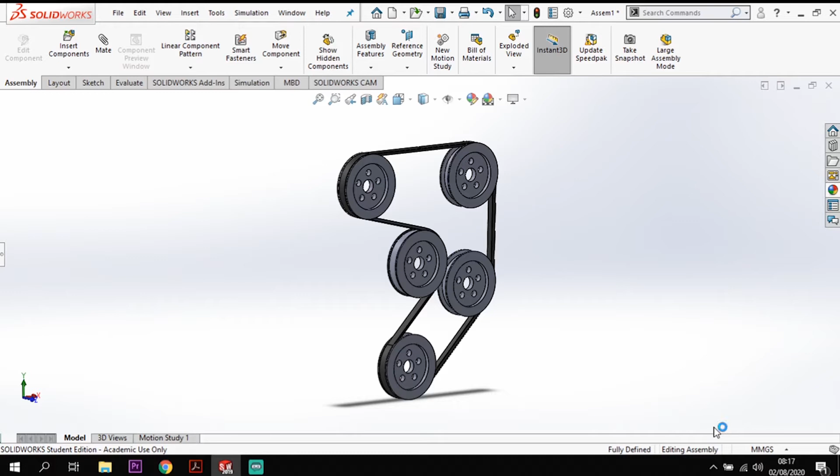Now let's dive in and have a go at modelling these pulley systems. Okay, so let's start off by making the pulley. We're going to make two types of pulley. The first one is going to have our V slot in it for our V-belt, and the other one is just going to be a guide pulley. So let's have a look.

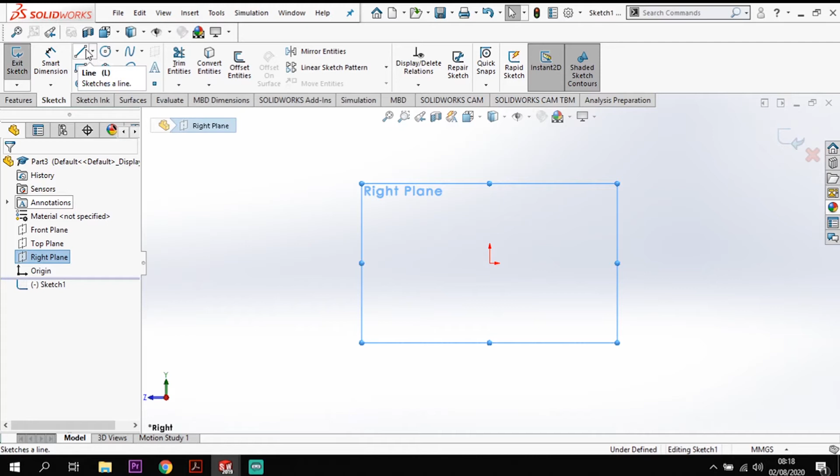So I'm going to start on the right plane, sketching on there, and I'm going to start off by creating a centre line through my origin here. I'll create my centre line, connect that to the midpoint, and I've got my centre line going through my origin. I'm just going to put a size to that, and it's going to be 25mm wide there, like so.

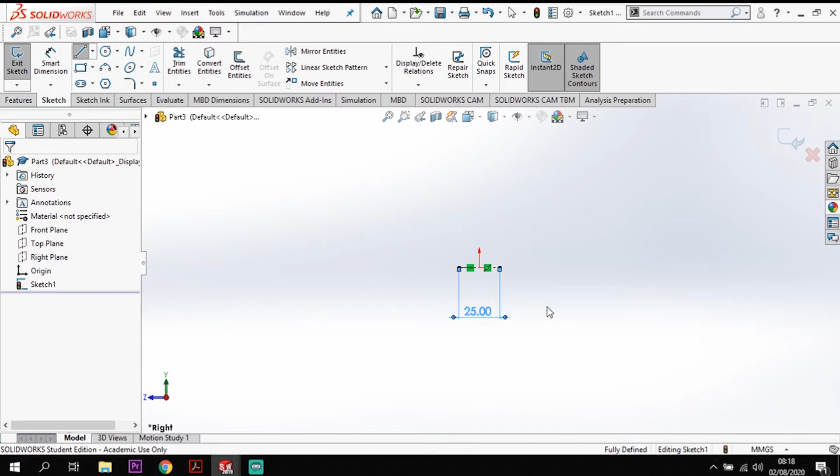Okay, so once I've got that in place, I'm then just going to create a centre line coming up here, and this is going to be 60.

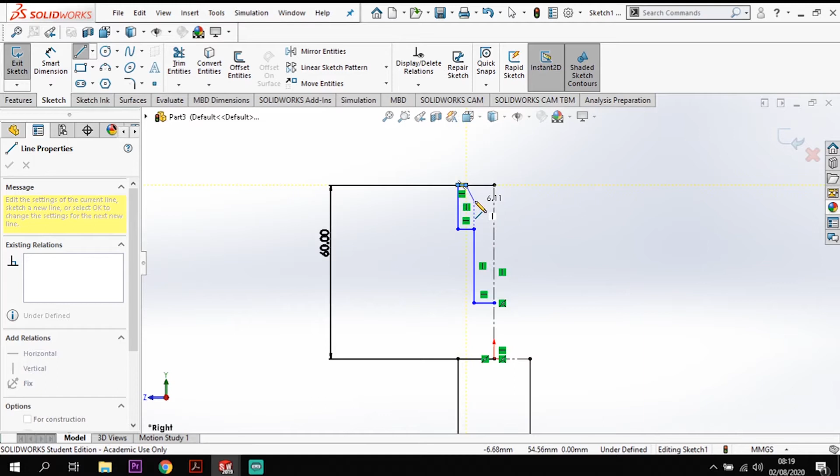Okay, so I'm just going to come out of this, create my step process, and I'm just going to get a rough outline of what I want my sort of V-belt to look like so. And then I can start putting some sizes to it in a moment.

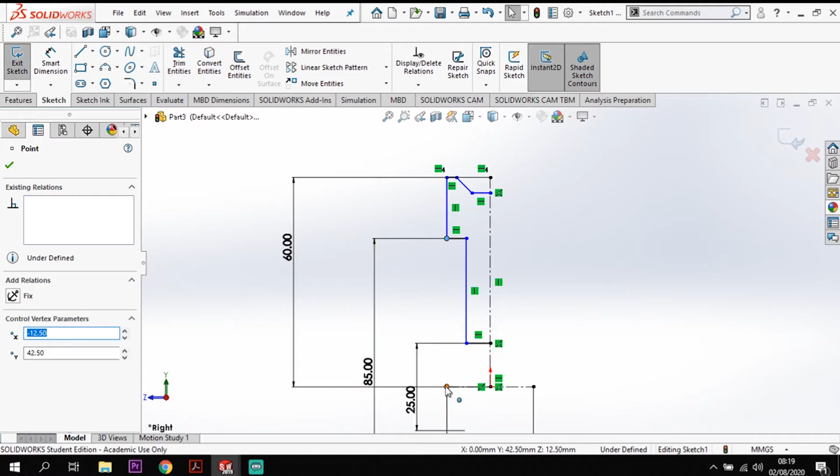So I'm going from there to there, that's going to be 25. From there to there, and that's going to be 85. And the top of here is going to be on line with the top of my centre line going across in the horizontal. I want this to be on line with the outside of my centre line through my origin.

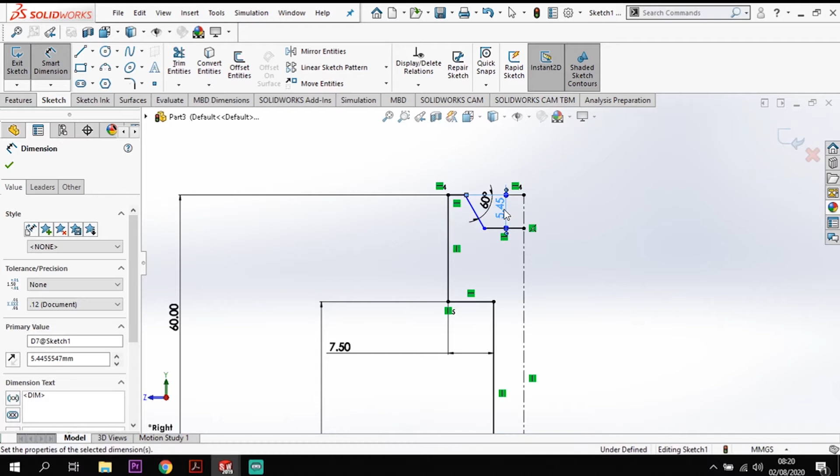And then I'm going to create a little offset here step of 7.5 in there, like so. I want my distance around there to be 60 degrees and a drop down step here of 6, like so. I want that little step in from the side there to be 3 millimeters, so just set that as 3, and we've got that information in place like so.

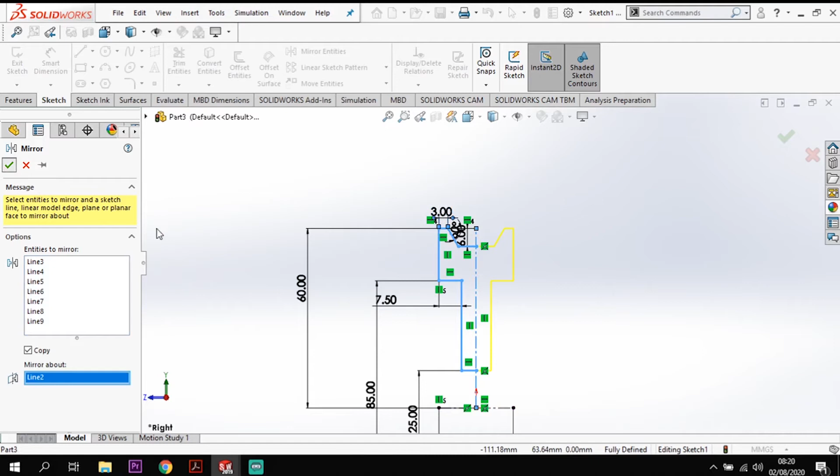Now once I've got that, I can mirror that across. So if I go to my mirror tool, I can take this lines I've created on this side, and I'm going to mirror about this centre line here. And I'll create the same shape on the opposite side, giving me the full profile.

Once I've got that profile in place, I'm going to go to Features, Revolve, and I'm going to revolve it around the centre line here at the bottom and get that shape.

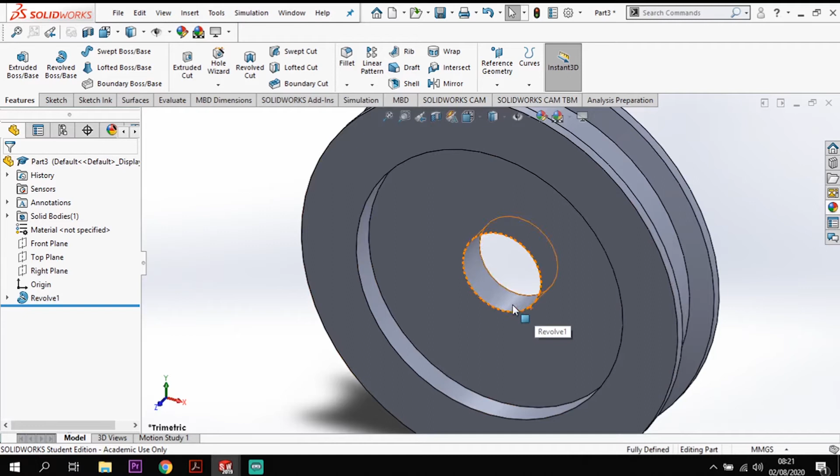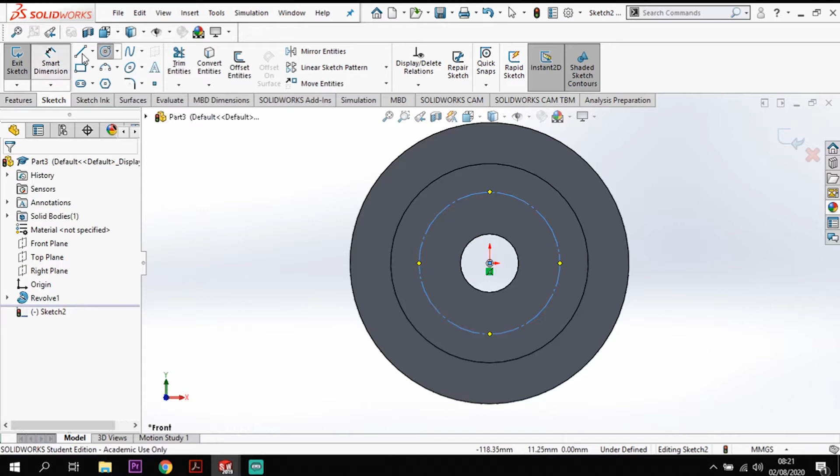With that in place then, I'm going to sketch on this inside face. Turn that so I'm normal to that face, and create a circle. That circle is going to give me my distance out from the centre, so I'm going to use that for construction, and I'm going to set the diameter of that at 50.

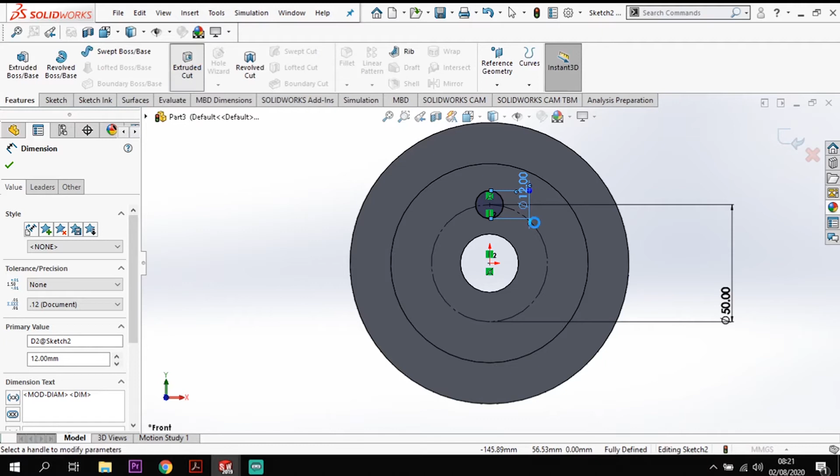Put a circle from that top section there, and that is going to be 12. So I've got a 12 diameter circle there, which I'm going to cut through. So Features, Extrude, and I'm going to cut through that, through my model with that there. So I'm going to go through all, making sure that it's coming out the other side, tick like so.

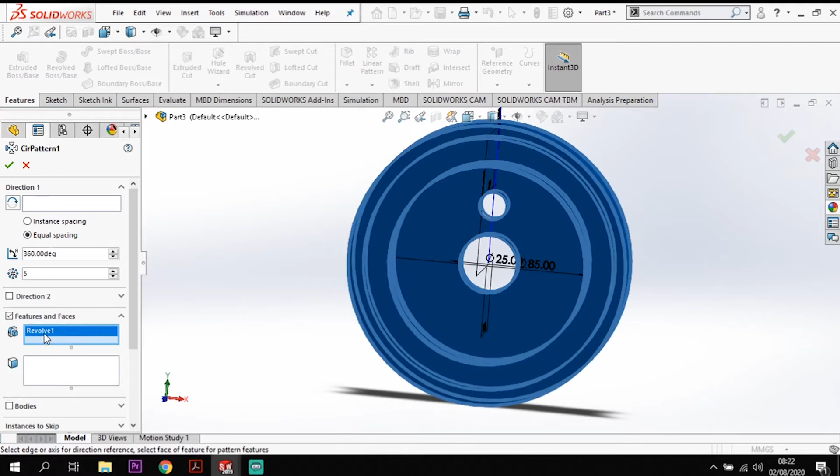Now I've got that one in place, I'm going to pattern that. So I'm going to go to the Pattern tool, Circular Pattern, I'm going to select this inside edge, any circular edge will do. Taking the pattern, let's take that pattern first. So I want that cut pattern as the component that I'm going to use, and I use my direction as that inside edge there, and you'll see it's picked up on them.

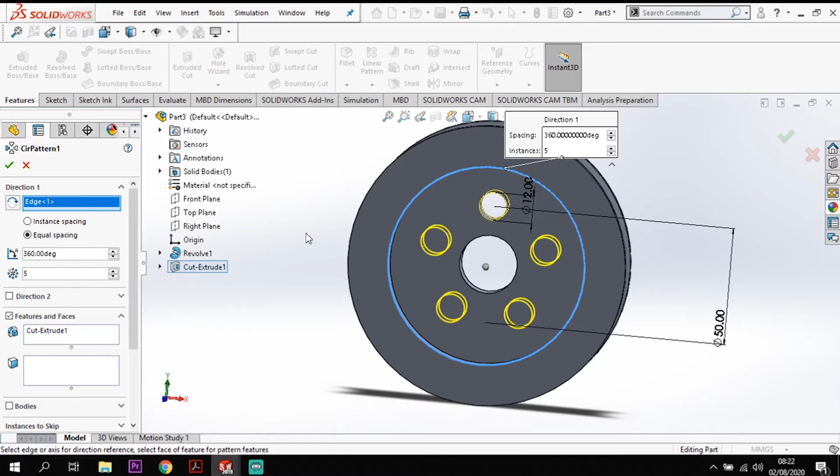I've got it preset equally spaced, and I have already set 5, so we're going to use 5 for this, but you could change that to suit, and that will give me the 5 cutouts there, and that is my first pulley completed. So I've got my V-belt pulley completed.

Now to create my second pulley, I'm going to edit this, so let's have a look how we go around doing that.

Right, okay, so now we've got that saved as our pulley. Let's move on to create pulley 2.

What I'm going to do is edit what I've already created here. So I'm going to go to my original revolve, drop that down and go to the sketch and edit that sketch.

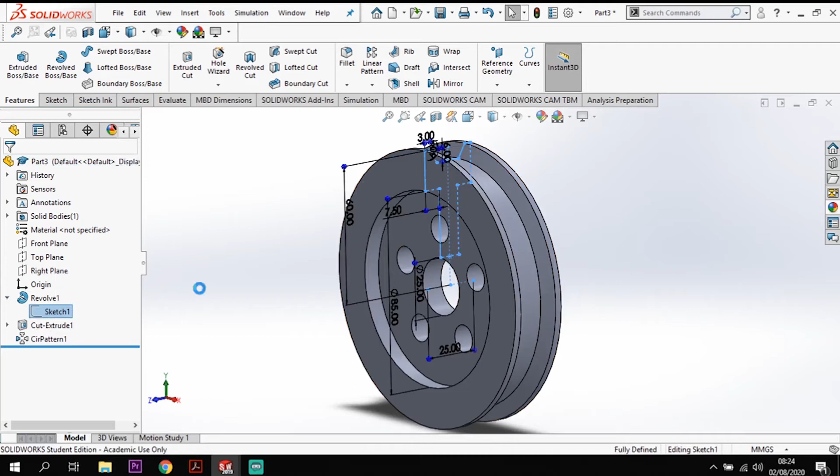I'm going to start off by editing this center line coming up. I want to extend that slightly, so I'm going to go up to 62.

Like so, and then I'm going to edit this profile here. So that's currently set at 60 degrees. I want to get rid of that.

Now this is a guide, so this is going to fit on the back side of our V-belt. Our V-belt on one side will be this V shape, and the other side will be flat. So I'm going to make this a straight, vertical line straight down.

I'm going to change that from 6 to 2, so it's just got enough there to hold onto the belt so it doesn't slide off. And there we go, we've got that shape in place now.

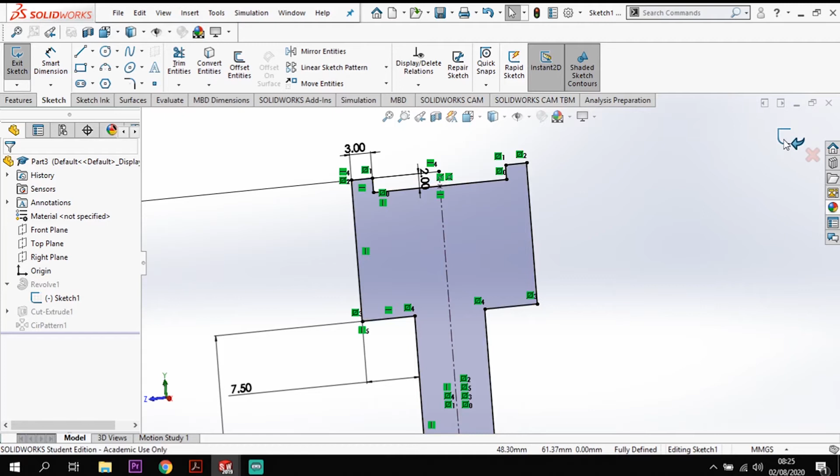So I'm going to come out of there, and you'll now see how I've got the guide pulley. Now I haven't changed the size of it. You could change this so that it's a lot smaller pulley if you wanted to, remodel it for a smaller pulley. Just for the sake of this tutorial, I've just changed the profile on the end there so that it guides the belt around.

Okay, so now we've got them in place, I'm going to go over to the assembly and have a look at how we assemble this together.

Okay, so now we're in our assembly. You'll see how the pulley option has come up here. So we're going to import our first pulley.

So I'm just going to click on that there, and I'm going to go to the tick icon at the top and drop that in. What that will do is connect the origin, which is in the center of here, to the origin on our page.

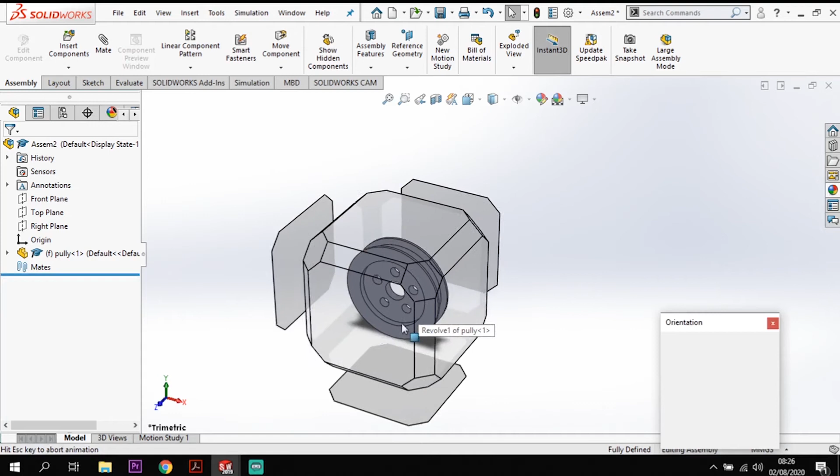So now we've got that in place, I'm going to create a profile for where I want the rest of my pulleys to connect to. So what that means is I'm going to create a sketch.

So on the front plane, I'm going to sketch, and I'm going to use a center line here, and I am going to drop some directions in, or some lines to follow for my mates for later on.

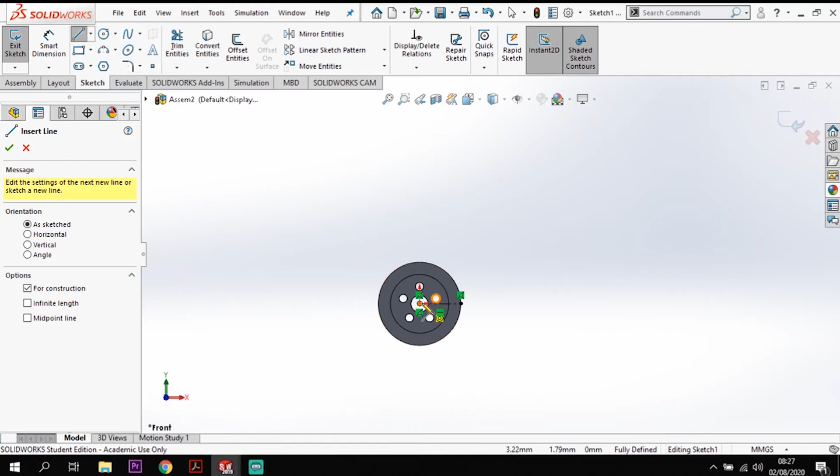So I'm going to come up here, and I'm just going to rough this out to start off with, and I'm going to create something that looks a bit like that. Okay, so I'm going to have a pulley on each of these points, and this will create the shape that I am after.

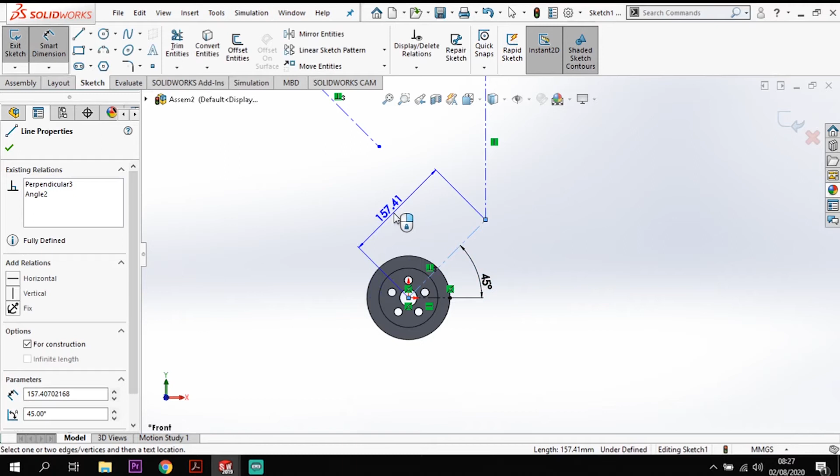So let's start off with from here to here, the angle there being 45 degrees, which it is. I then want the set distance there, which I want to be 200. I want this vertical height here to also be 200.

I'm going to make my offset distance going across the top 250. And then I want this distance coming down here to also be 200, but I'm going to create an angle there of 50.

Let's get rid of that relationship there before I can do that. So we've got our relationship there, which is making that perpendicular to that line, so I'm just getting rid of that. And then I can put in my angle there of 50, like so.

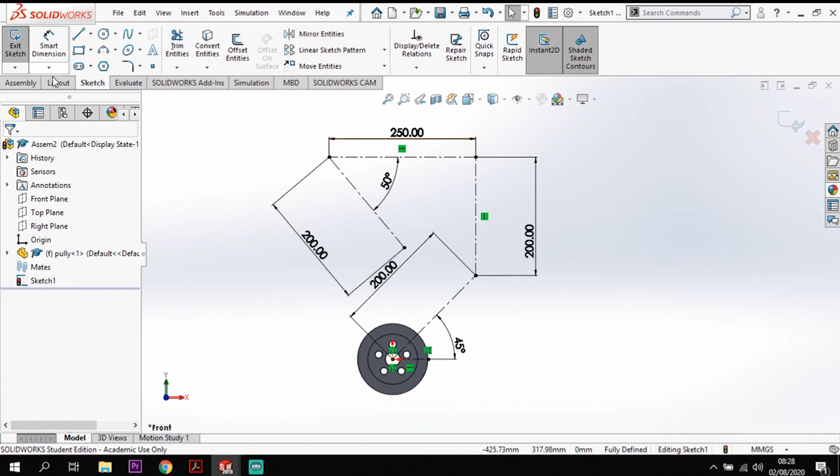So I've got that profile for where I want to drop each of my pulleys. So let's put some more in. I'm going to go to Assembly, Insert, Pulley, and I'm just going to drop one by each one for now.

Insert the pulley, insert another pulley there. Okay, so I've got them 4 pulleys in place.

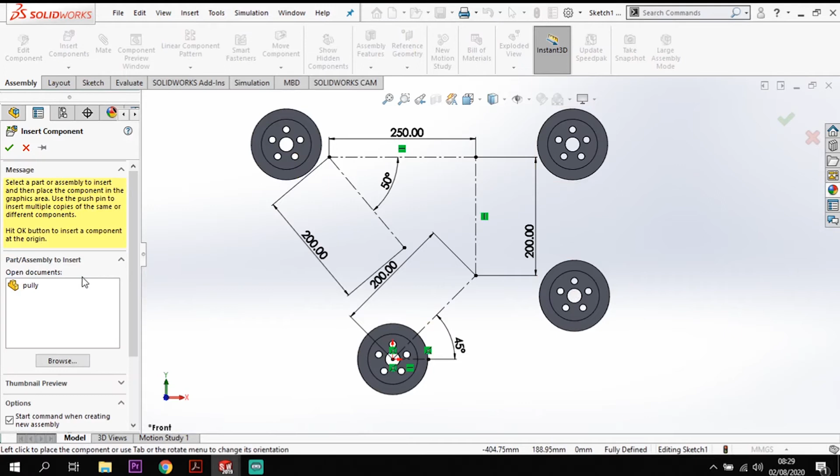I do also want to insert pulley 2, which is going to be my guide pulley, and you'll see that in a moment. So if I just drop that down there, like so, I've got my guide pulley and my 4 belt pulleys that will guide my V-belt there.

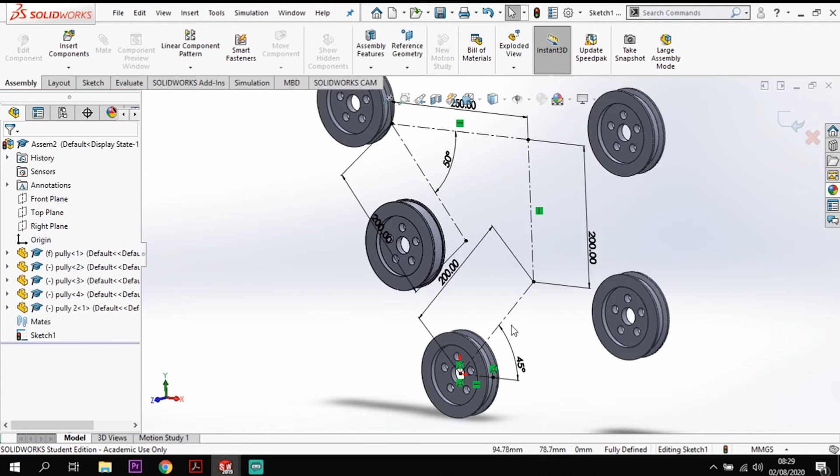So how am I going to make these? It's really simple. I've got pulley 1 there, which is fixed, so I'm going to go to pulley 2.

I'm going to drop down that, and I'm going to find the origin. So I'm going to drop down pulley 2, find the origin, and I'm going to hold control, and I'm going to click this point here at the end of my construction line.

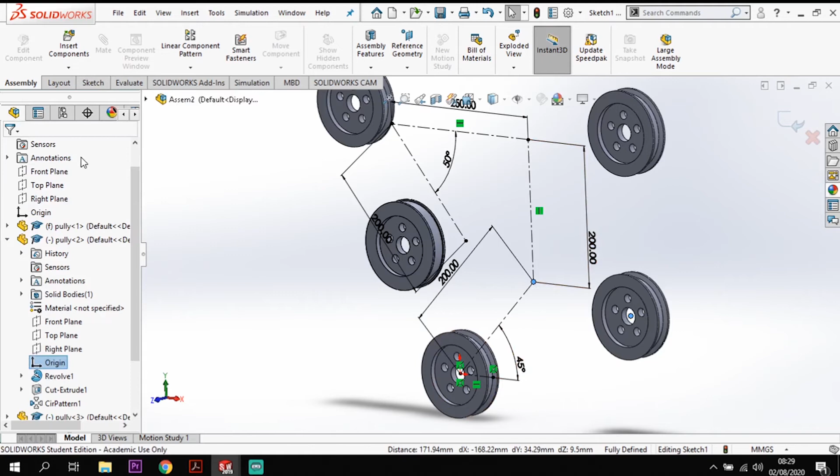Come out of my sketch first, that'll help. So we come out of our sketch, find the origin, find the point there, and hit mate. That'll pull that into place on that center position. Tick. Exit that.

Drop that back together. So that was pulley 2. Let's go to pulley 3 now. Find the origin, the edge, and mate there. That will pull that into place. So we've got these in fixed positions, so we know exactly where they are.

And just repeat this through all 4. So I've got my origin, the end point of the line, and again mate that there.

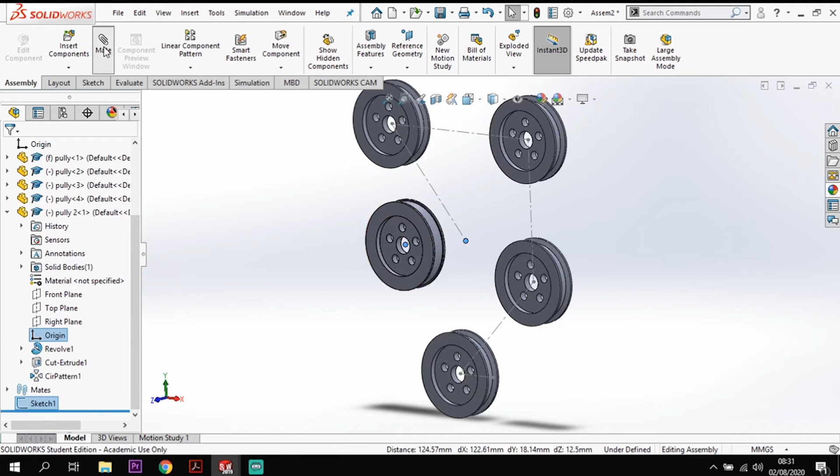Tick. And the last one is going to be my guide one. So I'm going to, again, find my origin, find my endpoint in my line, and mate them together again, and they will move into position like so. So we've got them all in place now.

And I can exit that. So what I'm going to do, so this construction sketch in the center doesn't get in the way, I'm just going to go to sketch 1 at the bottom here, and I'm just going to hide that.

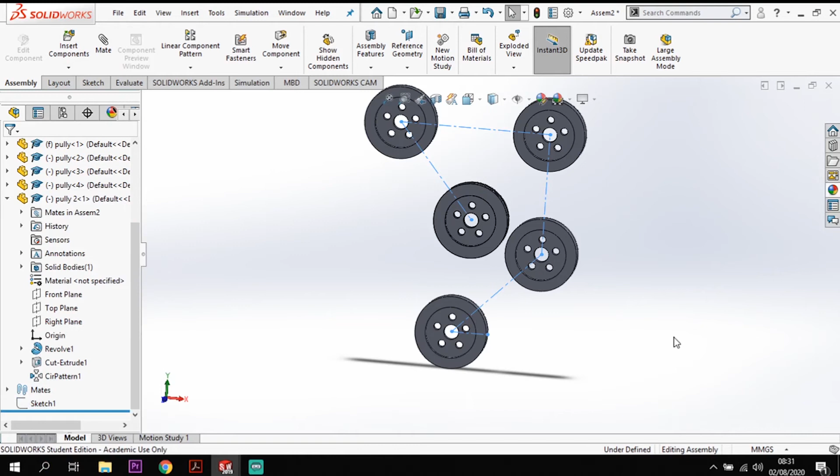Okay, so we've got them pulleys separated out into the positions where we want them to be. We just need to now actually create how we're going to do the belt. So to create the belt,

what we're going to do is we're going to create a sketch. Now I'm going to, again, on my front plane, create a sketch, and I'm going to use the line tool to do this.

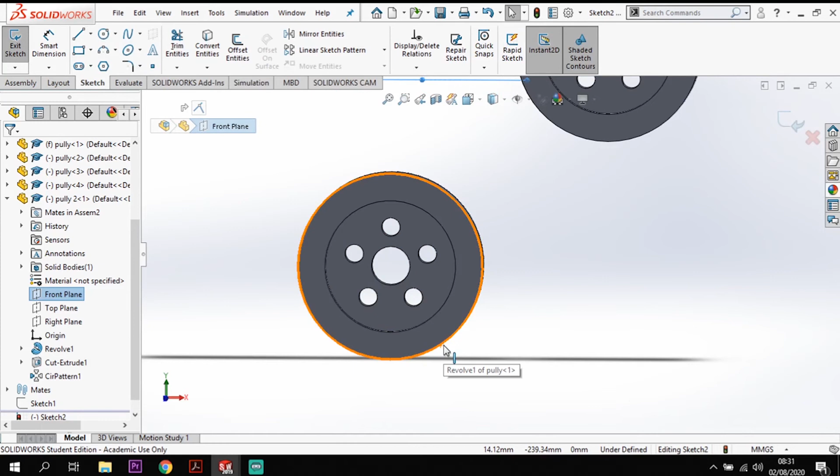But first of all, I'm going to go to each of the pulleys, and I'm going to get the outside edge of these 4, which I want the V-belt on, and on this one I'm going to get the inside edge there, like so. And I'm going to convert entities on them. That will turn them into sketches.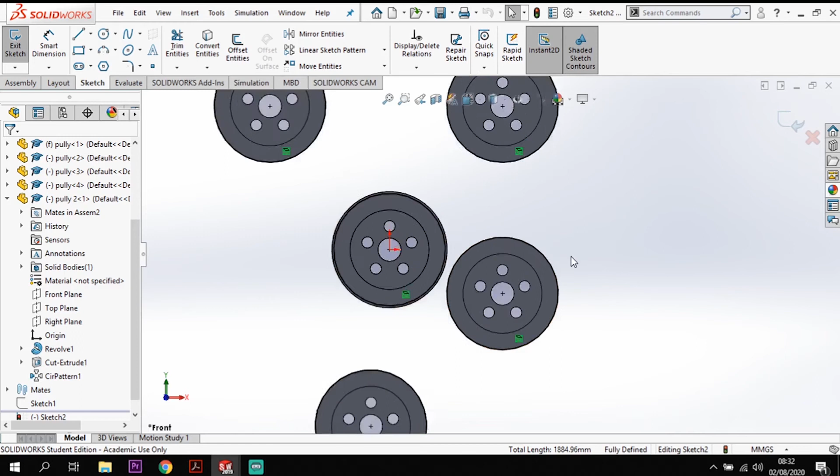So if I move straight on, or normal to the front face of all of them, you'll see there is now a sketched line on the outside of each of them. There's one on the inside there.

So I'm going to create a loop around them. So get a line. I'm going to come to this one, put a line on there, and I'm going to make it so it's tangential. So all I've done there is click on the circular line and drag it away.

And then I'm going to move over to the next one up here until I find the tangential point, which is there. Okay, and then I'm going to follow this around, so that one's going to come straight up using the end point of the circle, or the edge, or the coincident point, and follow across again to the top there, like so.

So I've got this line started to come around the outside. And then I'm going to find the tangential point on here, so drag out, we've got that again, and match it up to the one on that inside edge there. As you can see, it's matched up there.

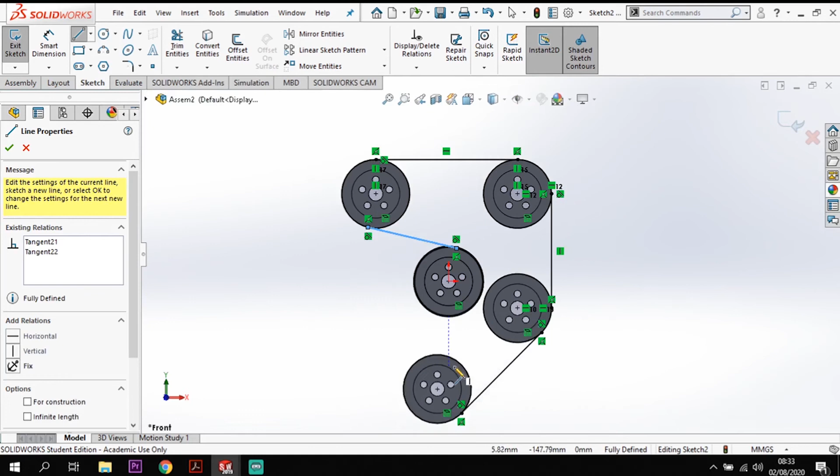And then I'm just going to finish off by creating a tangential point from this one down to our bottom pulley that we have there. And we've got that loop. So we've got this loop around.

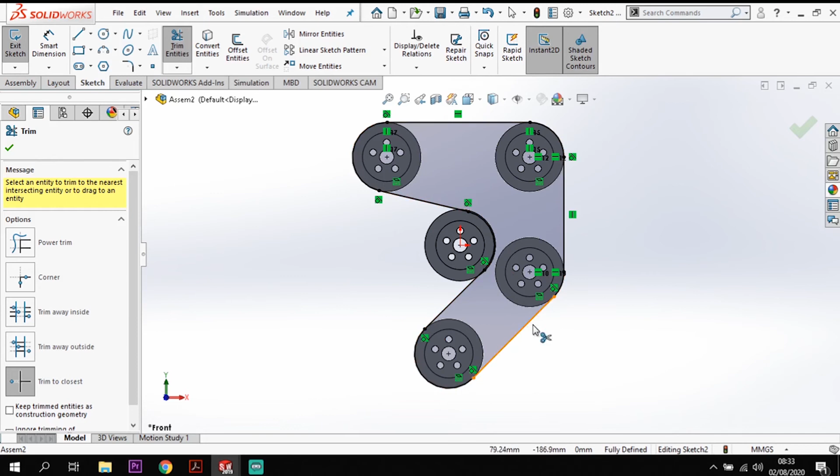We've got the inside edges of these circles, so I'm going to get rid of the parts we don't need. Just that, there, and there, leaving me with a completed sketch, a loop around that outside. So if I tick that and leave that sketch there, and you'll see we've got that loop in place.

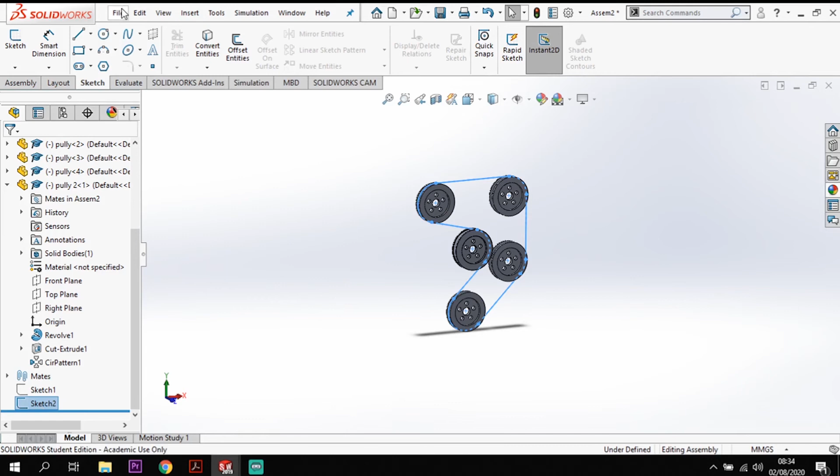So I'm going to take that loop, and we can do this really easy. I'm going to click on the sketch here, and I'm going to Control and copy on the keyboard. So Control C, and then I'm going to go to File, and I'm going to open up a new part.

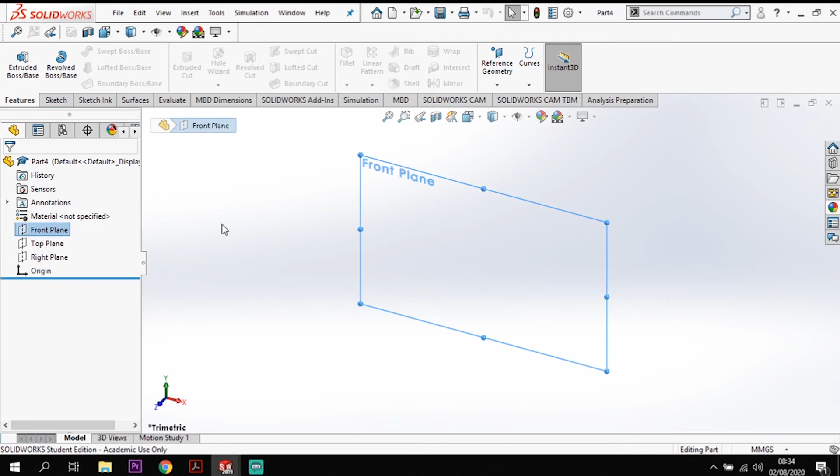Now on that new part, I'm going to go to one of my planes - doesn't matter which one. If I go to the front plane, and then Control and V. So I've not done a sketch, I've just clicked on the front plane, Control and V to paste, and it will copy the sketch onto that plane. So if I go to my front plane now, I've got that sketch on my front plane in a part, and from here I can model my belt.

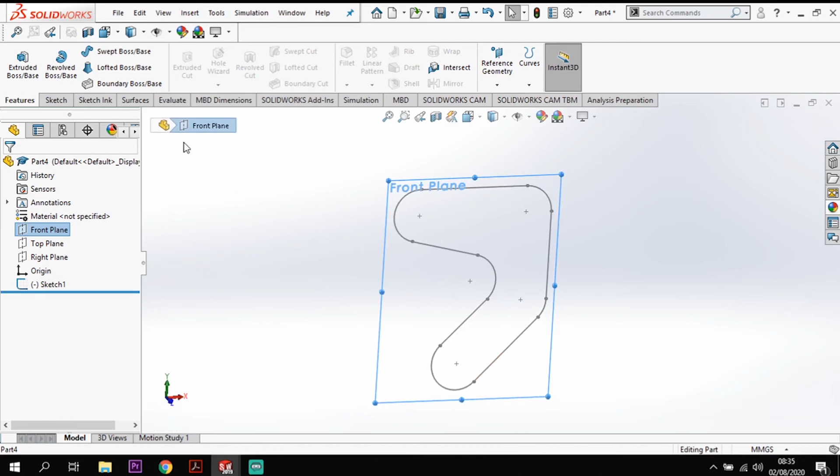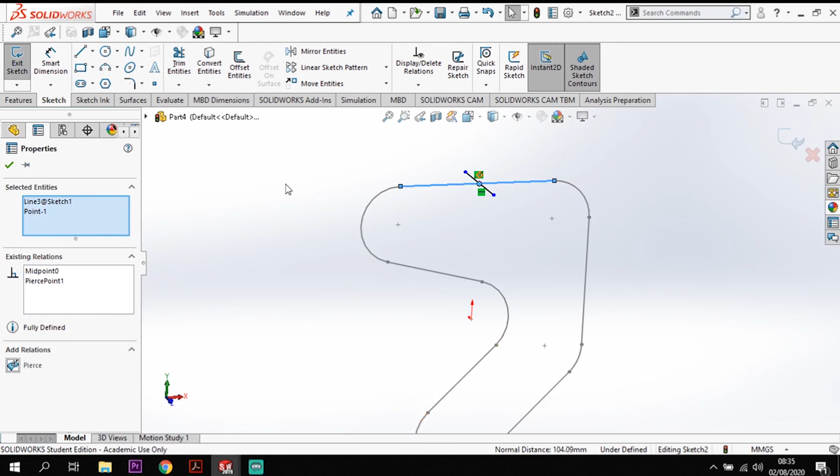On the right plane, I'm going to sketch and create a line which goes coincident to the top point there. So I want that center point of the line, and I'm going to pierce it to that shape we've created for our belt. Once I've got that in place, I'm just going to turn normal to that sketch.

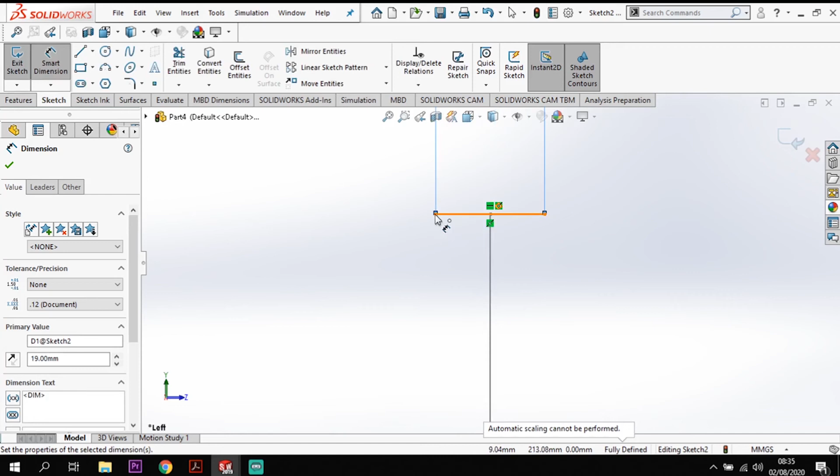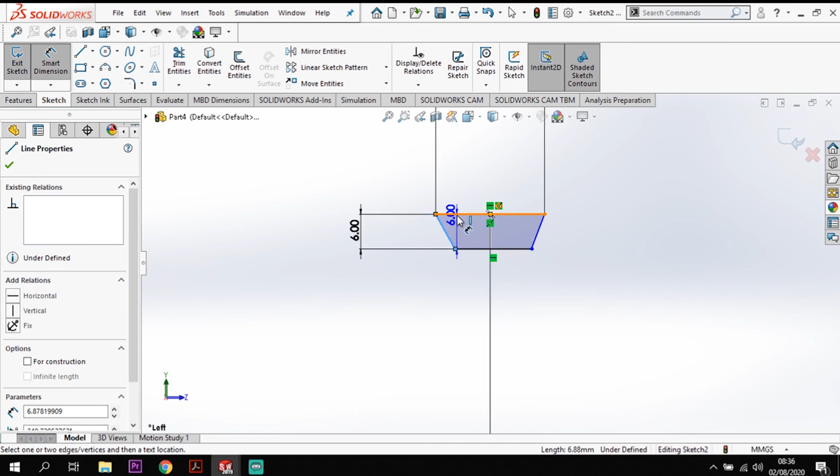Then we can start creating the shape we want. So this is going to be 19 wide at the top, and then I can sketch in my lower profile, and put some sizes to this. So distance from there to there is going to be 6, and I want that angle at 60, and I want that angle and that angle to be the same, so I'm just going to make those two lines equal to each other.

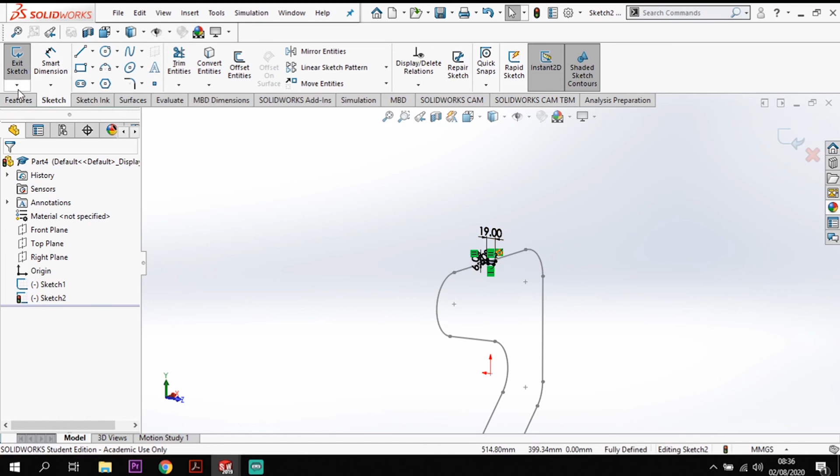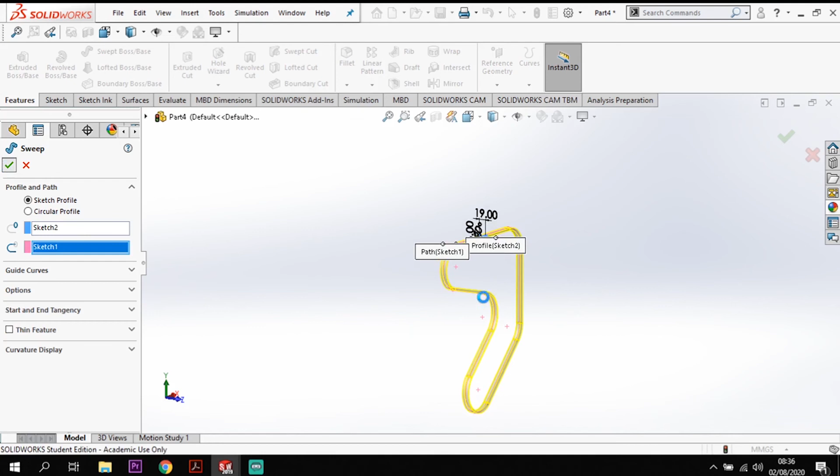Once I've got that in place, that gives me my belt shape. I've got my track, or my profile I'm going to follow. So I'm going to go to Features, go to Sweep, which will sweep that profile around the track there, like so. And we've got our belt - that's continued all the way around, and we've got the belt we're after there.

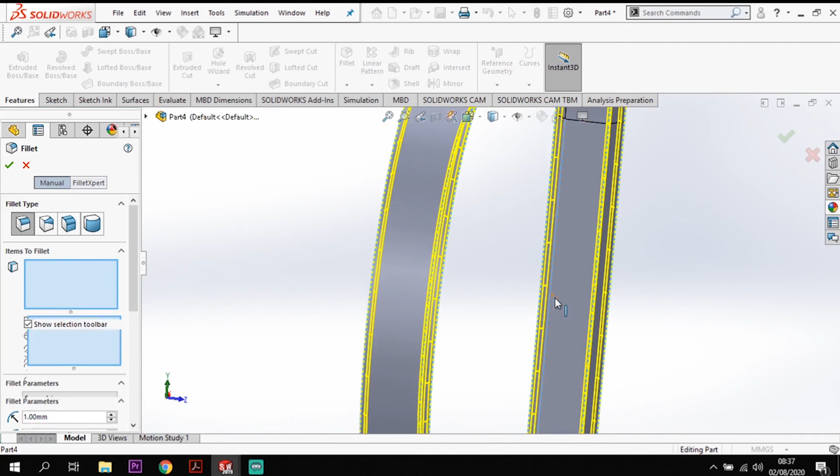Now I'm just going to finish that off with a fillet. So I'm going to fillet the edge, and I want that to be a 1mm fillet, just around that, the edges of the belt, just to round them off.

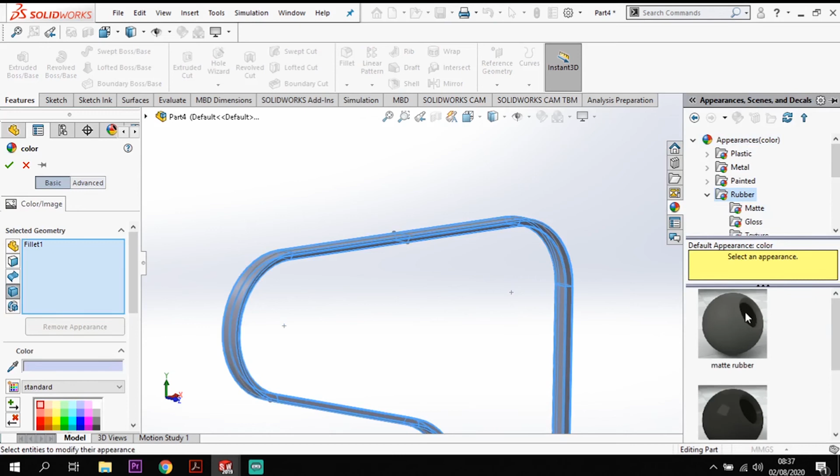That will leave me just needing to apply a bit of appearance to this. So I'm going to go for a rubberish looking belt. I'll go to Appearance, drop down for the body, and if I go to Rubber, let's go for a matte black rubber and drop that in there.

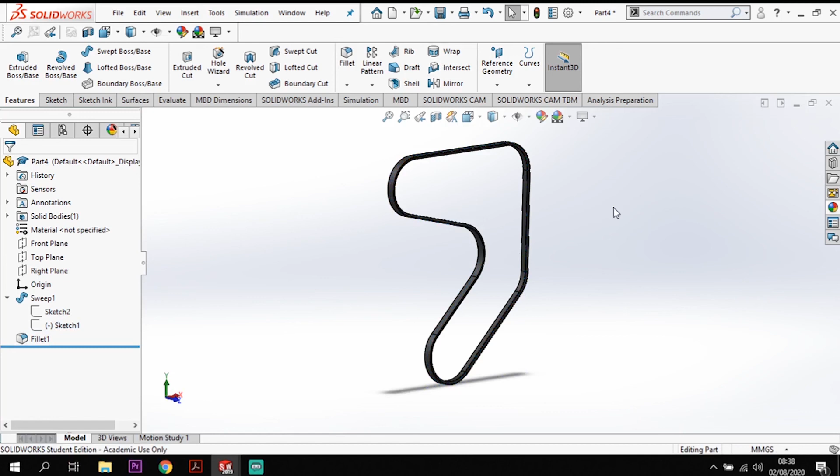You'll see the lines in here - we can just hide them if we don't want to see them on our model. Right click, hit the eye icon to hide it, and the same on the other. Now we end up with our belt. If we save that, then we can move back into our assembly.

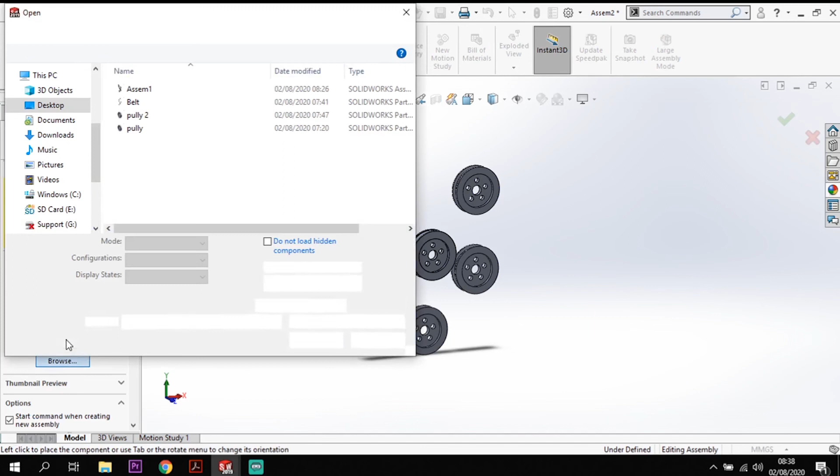We're in our assembly now, and we've still got this profile on - I'm just going to hide that profile, so Sketch 2, hide that. At this point now, I can go to my assembly, insert component, and pull in that belt that I've saved and created. So belt, open, and we've got that belt profile there.

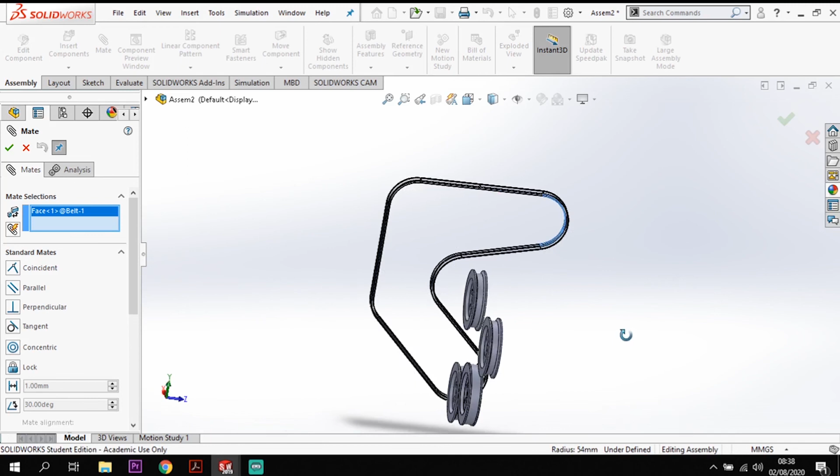At the moment I'm going to have to move that to get it in place, so we can create a mate. I'm going to mate the inside face there to this inside face here, like so. Now you'll see it's not in line, so we can bring that in line.

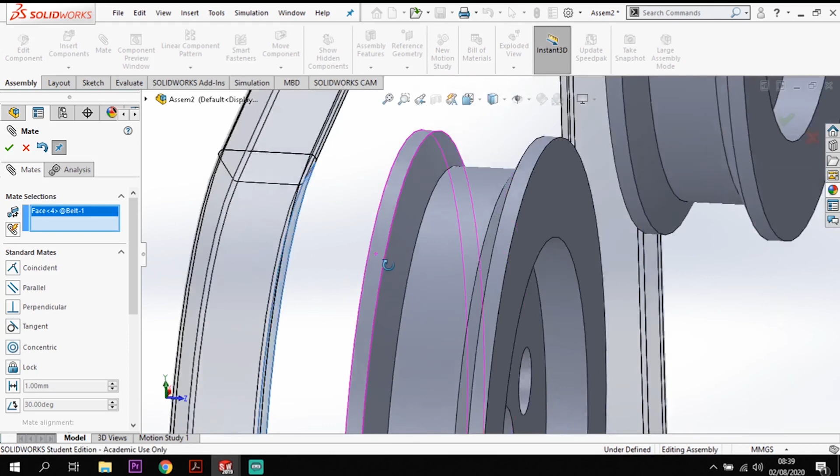I'm going to get this angle here and make it - in fact not that one - let's take that inside angle there and make it in line with there. That just pulls it into position. There we go, so we've now got that pulled into position.

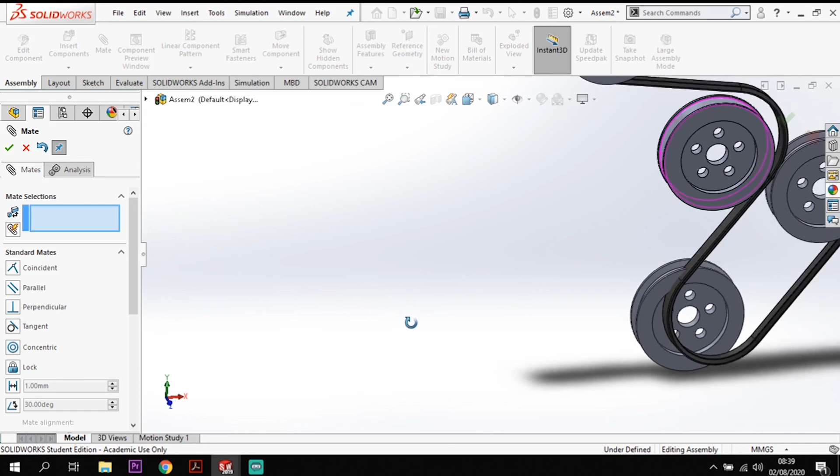It's not fixed though at the moment because it will still move - if I show you, grab there, I can still slide it around. So let's fix this in place with another mate. I'm going to take this bottom section here and mate it to this section here. Tick, and I should now have my belt fully in position going around my V-belt system and guide pulley.

So that takes you through how we can model a belt system. Hopefully that was useful for you. Have a go at that - it's an interesting model to try out. It's something that's new, something that's maybe a little bit harder to have a go at if you've not tried something like this before.